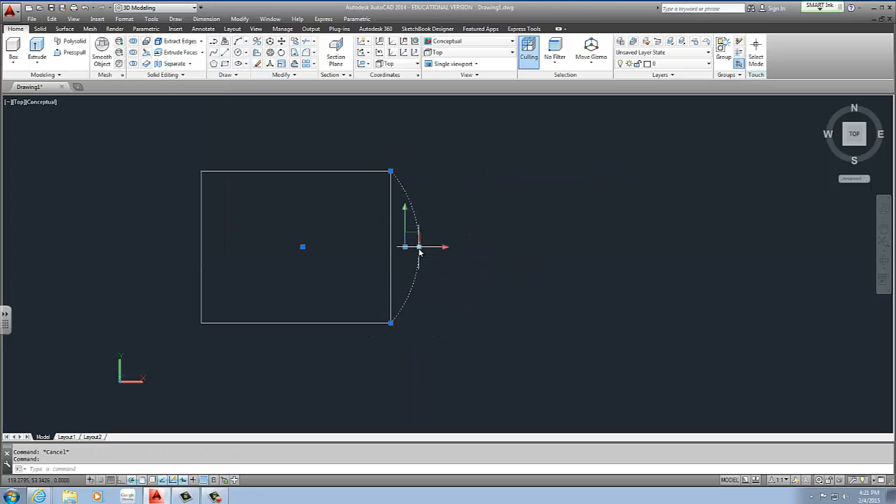The arc is pretty simple, you do a 3-pointed arc. Where are we, arc? So 3-pointed, like so. And you know what, I'm gonna have to change this. So I drag the center of the arc, make sure it snaps onto the line, and then you adjust the back too.

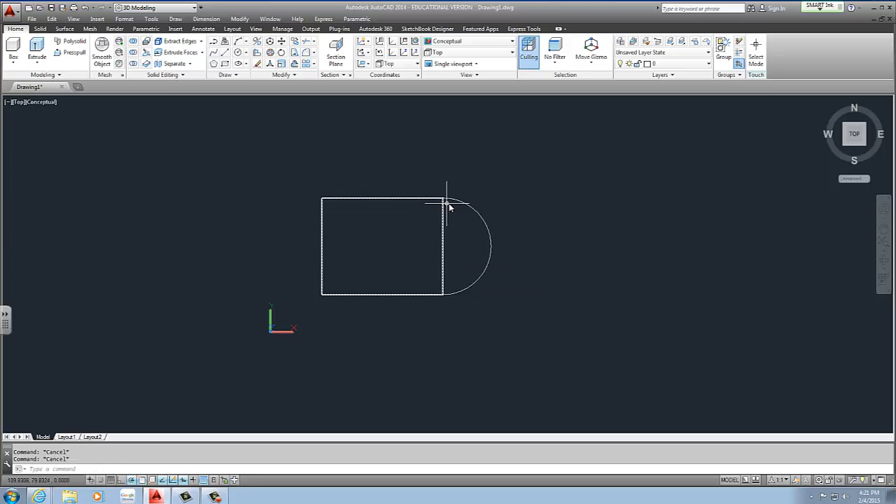Create your arc. Now you can explode the rectangle because it doesn't have to be a complete solid object, because we need to use the center as our circle.

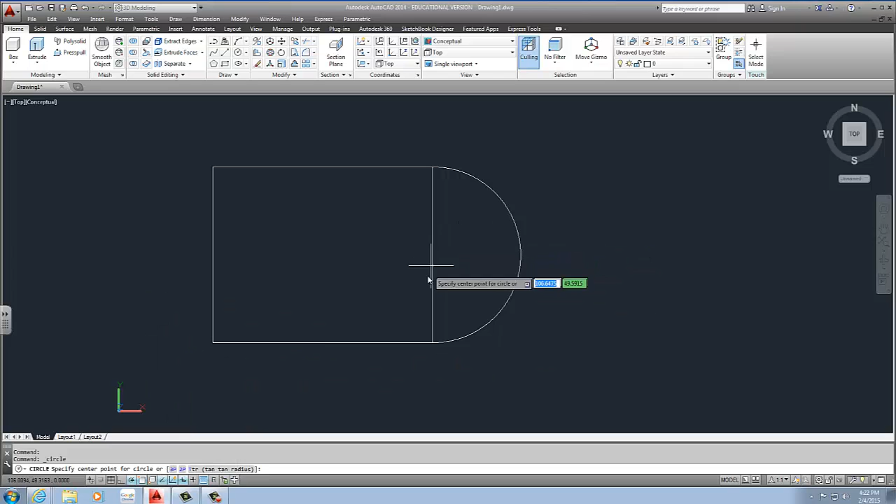So the option would be to, actually we can just add the circle now. So circle, we'll create a circle right at the center of this line, making sure our midpoint osnap is active. We select it there, we type in R for radius, because that specifies a radius. We are default radius, diameter would be the option. If we want diameter, we'd type in D, enter, and then type in 10. So we left it as radius, and the radius is 10.

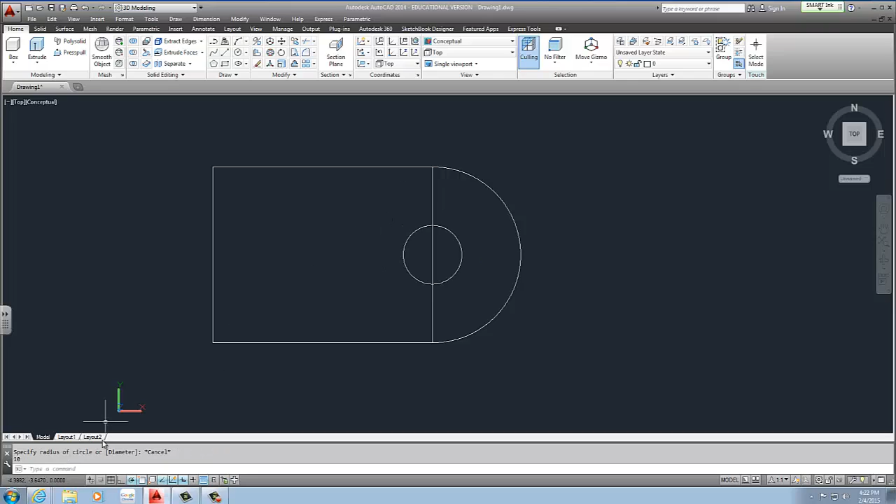I'm going to explode this rectangle I created. I go and select it, I go to modify, there is an explode tool. We explode that and we move that line. So we get something like this, and from here we can just do press pull.

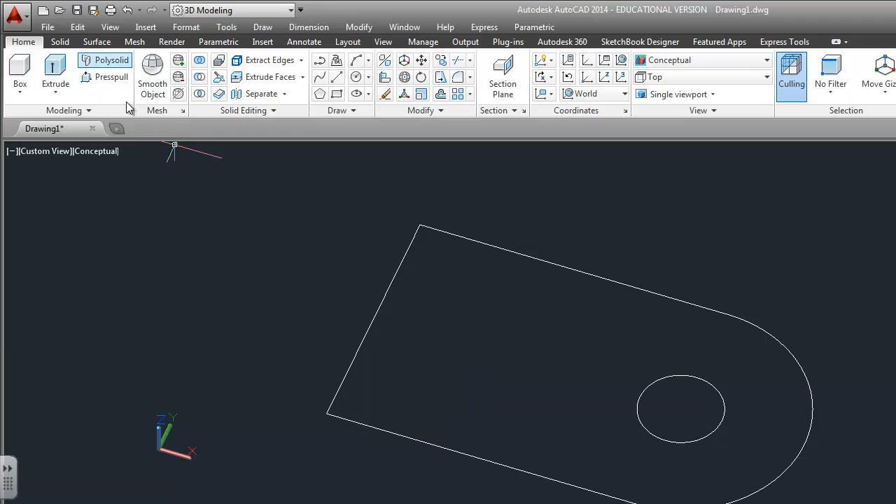That's if it takes it. Oh, it's not. Okay, I'm gonna... oh, we need a single solid object to do the press pull from. So we can't really do the press pull at this moment.

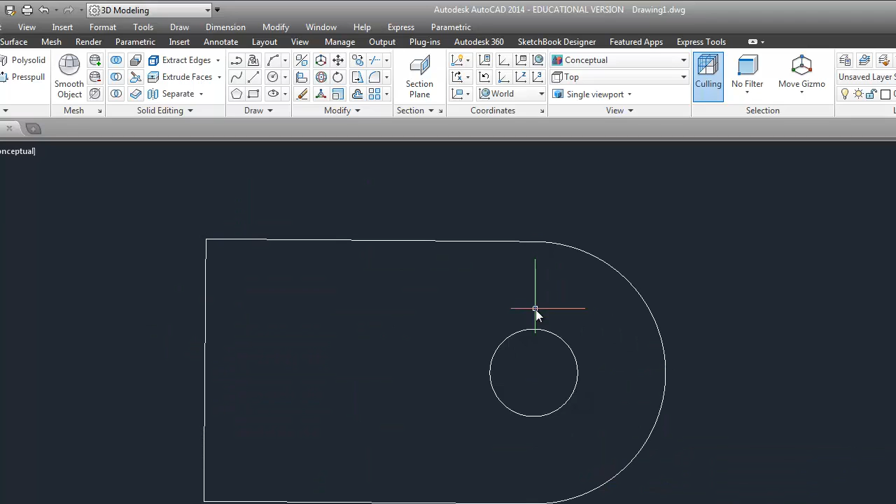So instead, we'll have to use the extrude for this part. Problem with that is that it's no longer a solid line or a polyline, as you can see. Here, I'll show it to you guys. They're all segmented lines, and extruding that will not allow us to create a solid object. It will pretty much extrude each line separate.

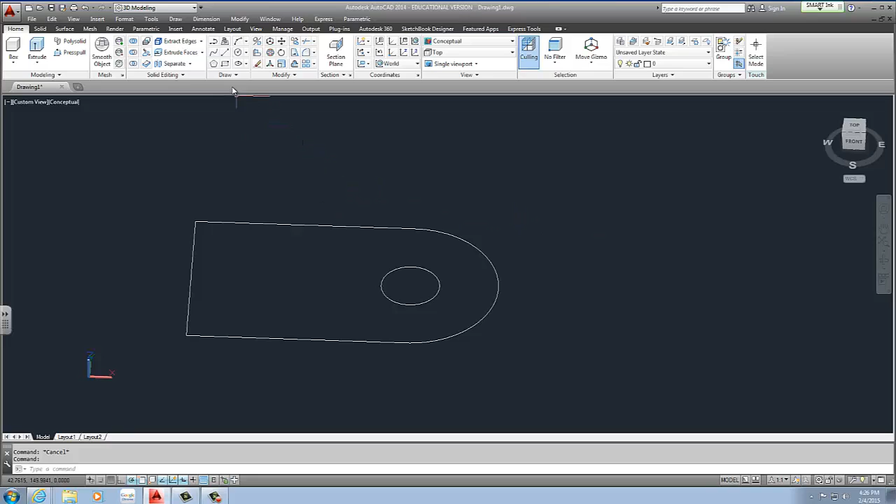So we have to resolve that issue, and to do so, what I recommend doing is using the command region. So now we make it a region. To do that, what you want to go to is draw. There's an arrow next to it, and there's a region command. You can also type it in if you can't find it, that also works. So you select region.

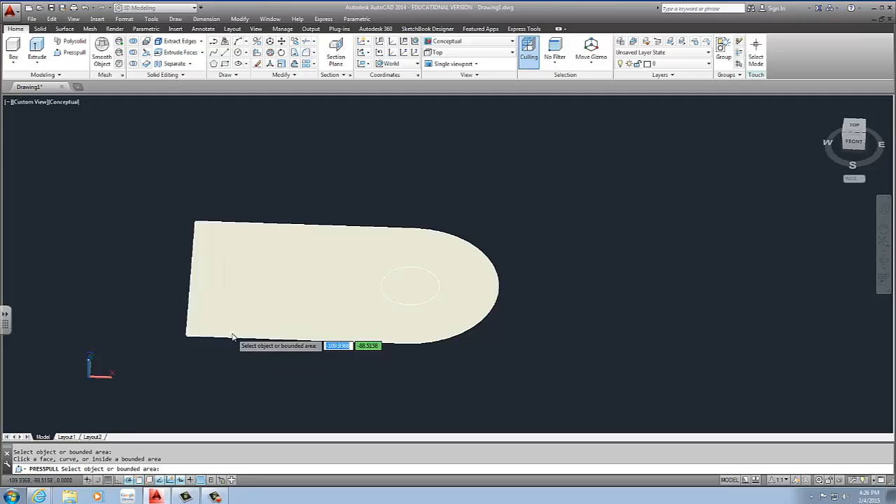We select the entire object as we have created, we click enter or space to accept it. And now we can use the press pull command. Well, guess it doesn't want to press pull, so we can use the extrude command, and we'll extrude it up.

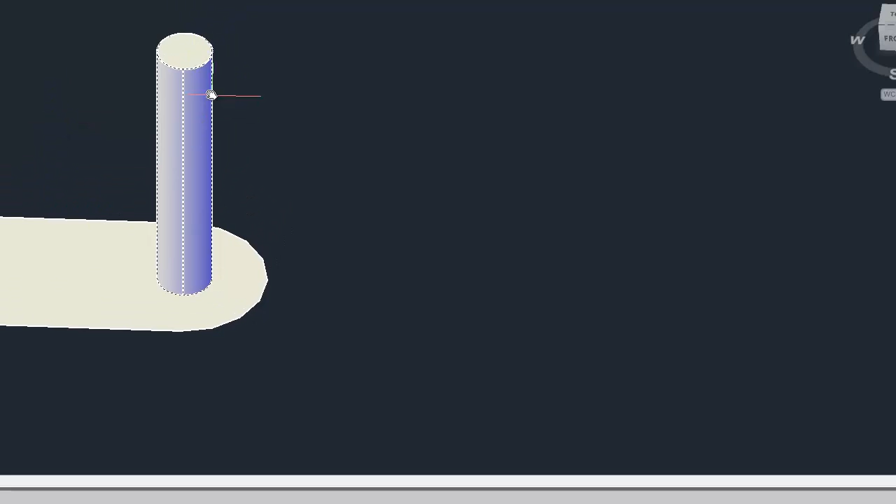Now the option is to either extrude the big part, or you can extrude the cylinder first. I recommend doing the cylinder first because it's going to be too hard to select after you create the big cylinder, the big part. So create the cylinder first, use the extrude command, do that, and then extrude the second portion, which is this main portion, at which we do have a dimension for, and it's going to be 15.

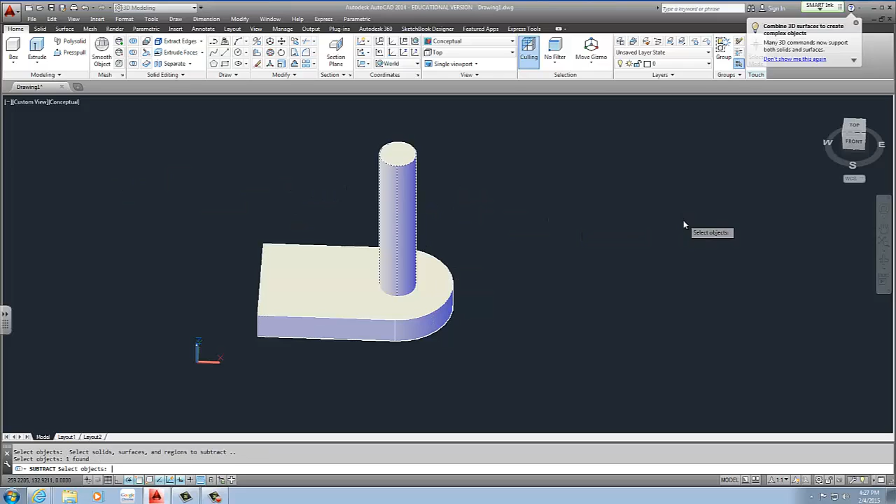Once you have these two parts, you use the subtract command. You subtract from the large part, click enter, select the cylinder, click enter. That creates your first fundamental design.

Second part, I'm going to create every segment of this one big part on a top view, and then I'll rotate it around using the rotate gizmo. I think it's the easiest way of doing it. Now, if you don't agree with me, please leave now.

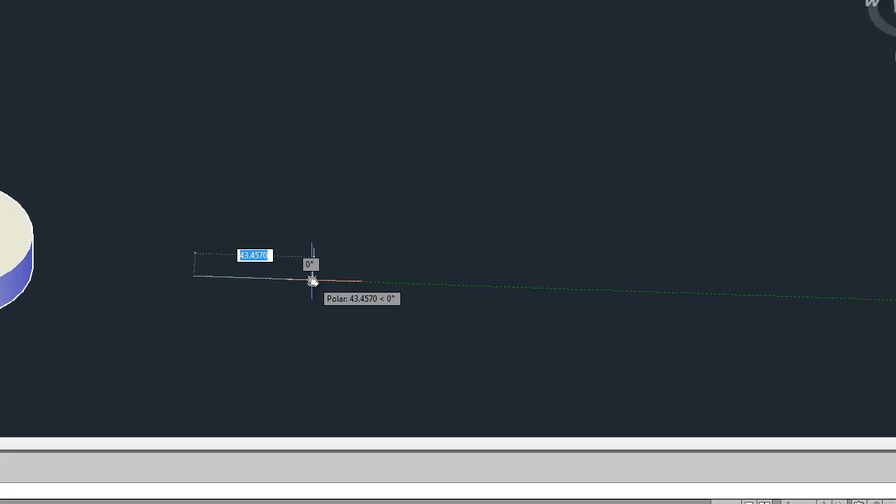Alright, so we start a line command where you're going to create the triangle that's right on top of here. I'm just going to use a line command, do a horizontal line that is 25, the overall height, using a little math here.

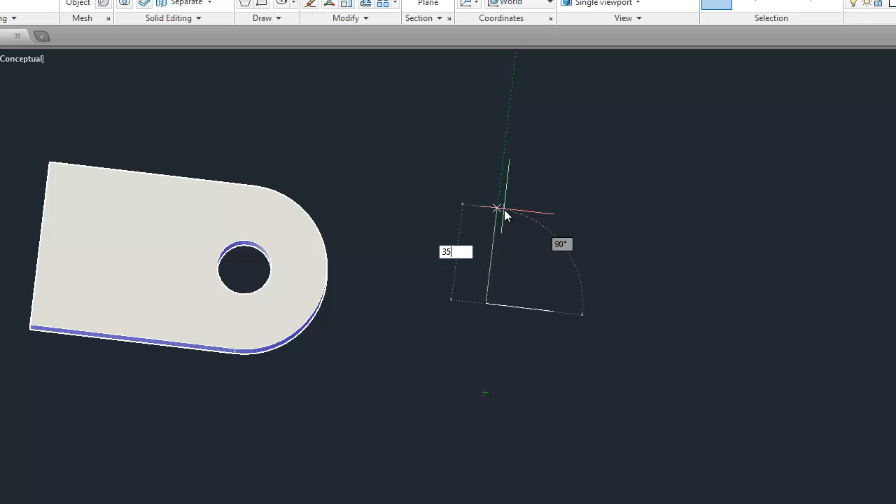Actually, I want to make sure I'm on the top view. Using a little bit of math, I discovered that it's 35. Am I right? 30? No, I think it's 45. It's 45, and we close it up.

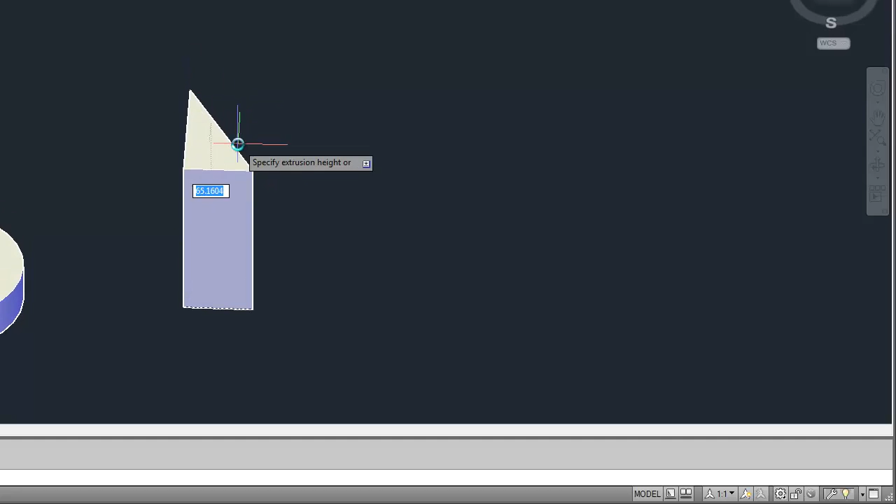Also, we need to create this at, well, actually we can try press pulling it. Now we can press pull because we already have something that's 3D. Normally, press pull won't work until you have something on the screen that's 3D, so it can figure out which way it's press pulling or extruding out. Our thickness for this is 10.

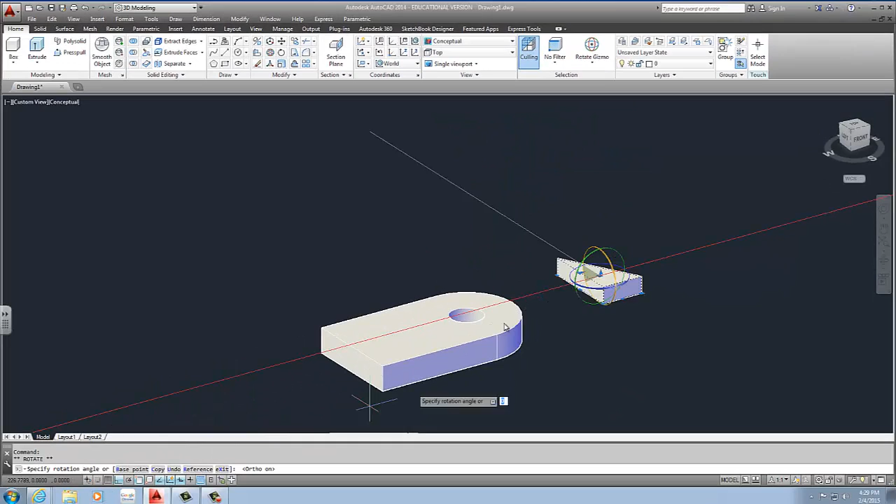Now to do the quick placement of this part, all you have to do is select it, change your move gizmo into rotate gizmo. We rotate it based on, for me it's the x-axis. I have to make sure my ortho is on because otherwise I risk the chance of creating a weird not a 90-degree angle. And then all we have to do is move it based on the midpoint of the back to the midpoint of the top here.

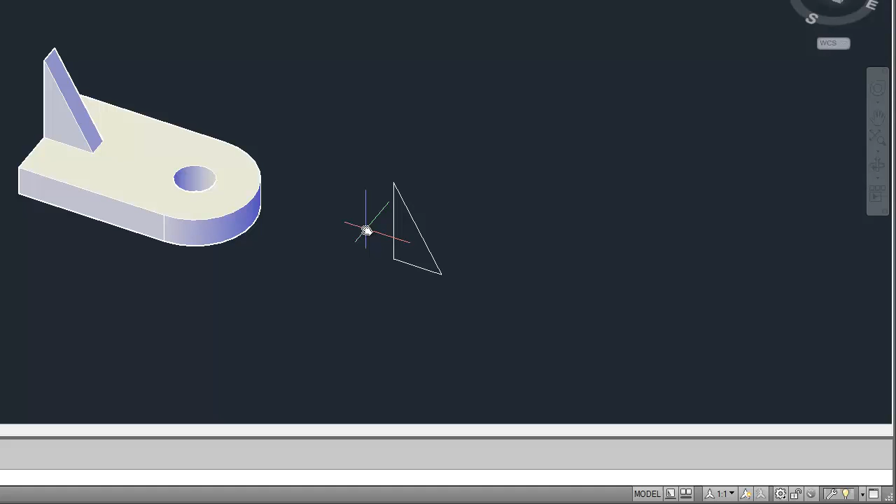Now the way I have my default setup is that it leaves my 2D sketch as I create a 3D object. You can change that, you can remove that, so every time you design a 3D part from a 2D part, you could remove the 2D part by setting up del object. So you have to type in DEL OBJ, and you could set it from a value higher than 1 to 0 where there is no data left behind.

So I put 0. If I had a rectangle now, rectangle, and I did my extrude command, and if I move it over, oh man, I think it's 1 that has to be deleted. So that's del object of 0, so I don't delete any object.

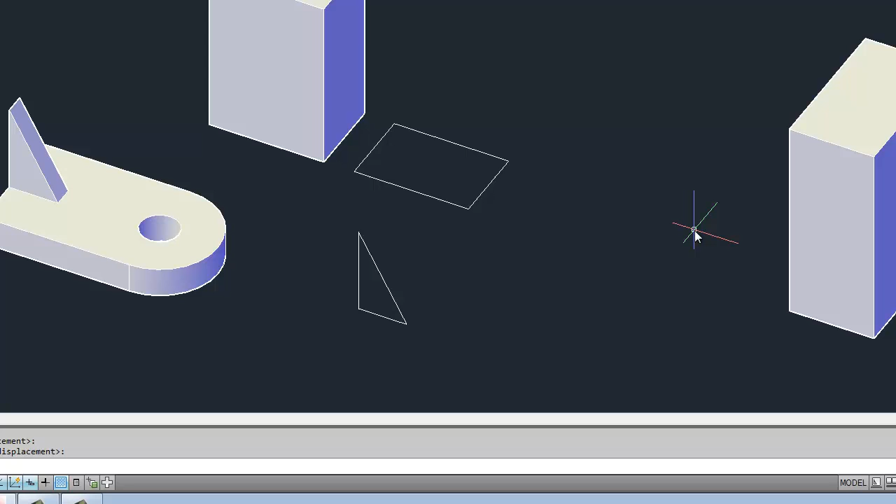Del object of 1, I'm going to do the same exact thing, extrude, move it over, it disappears. So that's it. Del object 0 means it won't delete anything. Del object 1, it will delete the first sketch. And I'm not quite sure what the other del objects are because it goes up to as many numbers as you can plan. So but you should do that before you do a press pull, or?

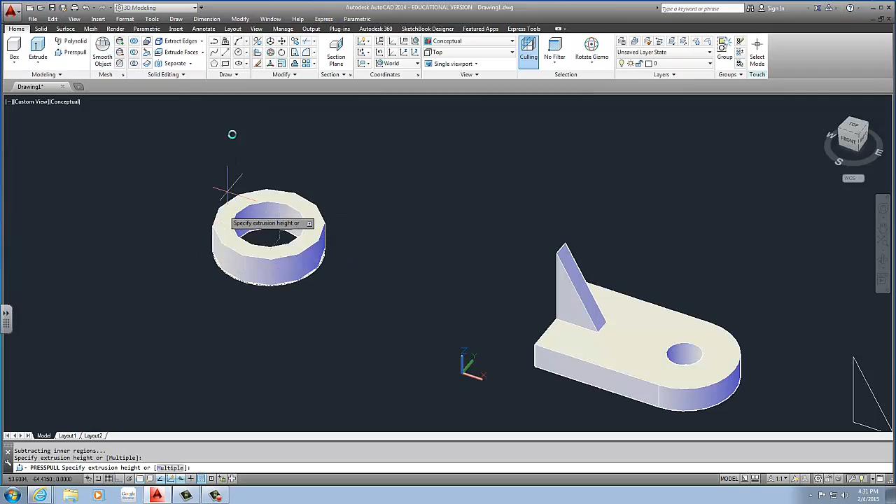You would. Okay, so that's the first segment of the part. My next option is I can do the cylinder. It's pretty easy, it's 2 circles. One is diameter of 60, and the center circle of this is a diameter of 40, and I can use the press pull of a height of 60. So that's my second part.

I can, if I want to, I can actually move it over. I would have to select the center of the bottom, so you have to look for that center circle that shows, and it even gives you the information there. You click on that snap, center snap, and you place it at the midpoint. Yeah, it's the midpoint here.

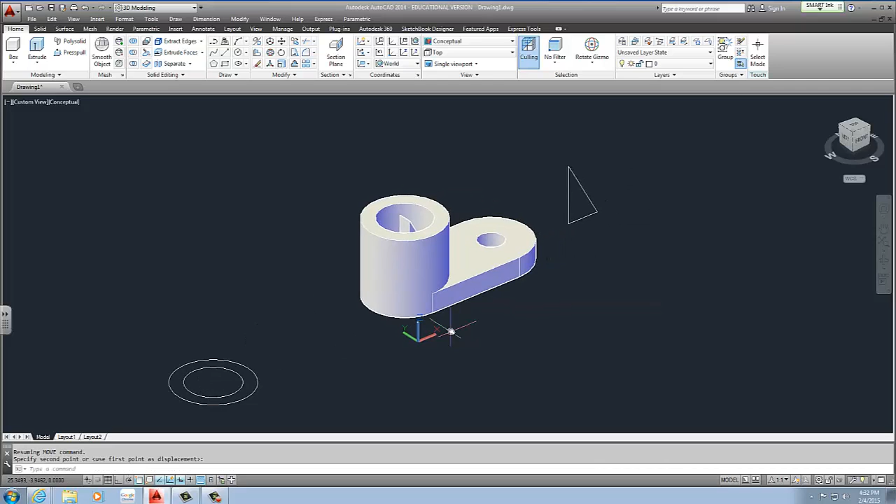So now what I realized is my triangle's off. That should be in the front. Oh, it's radiused. That's not good. And then we'll just move this triangle forward, which now I've realized that we're going to have to adjust this a little bit here.

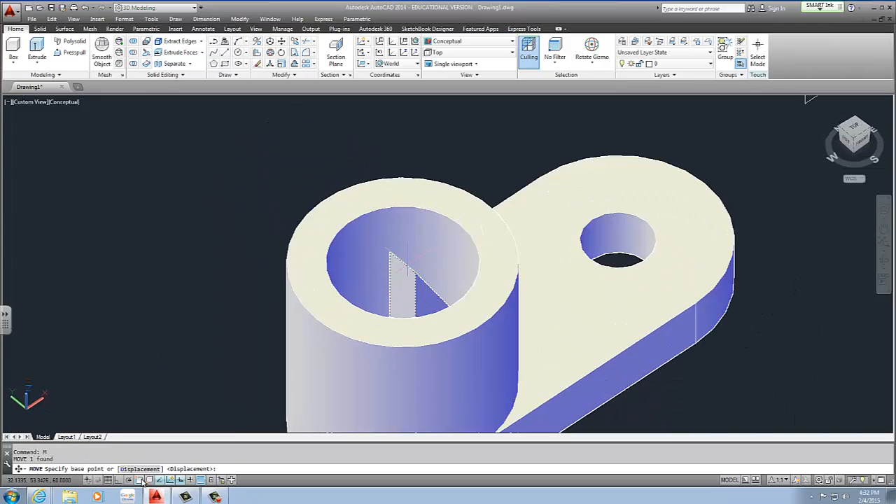Making sure I have the quadrant active, I'm going to place that to the quadrant. Maybe is there a gap on the drawings? You can't tell. Alright, we'll fix this later. But, so we have the second part.

Now the final part is the back. There's a few ways you can do this. You can draw it based on the top view or a left side view. It's really up to you how you want to do this. But I'm going to do it from the top view since I'm doing everything on top view.

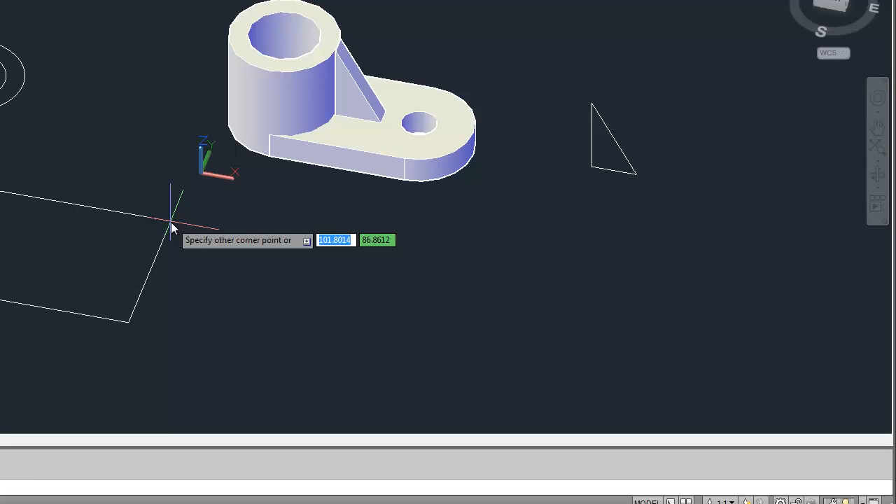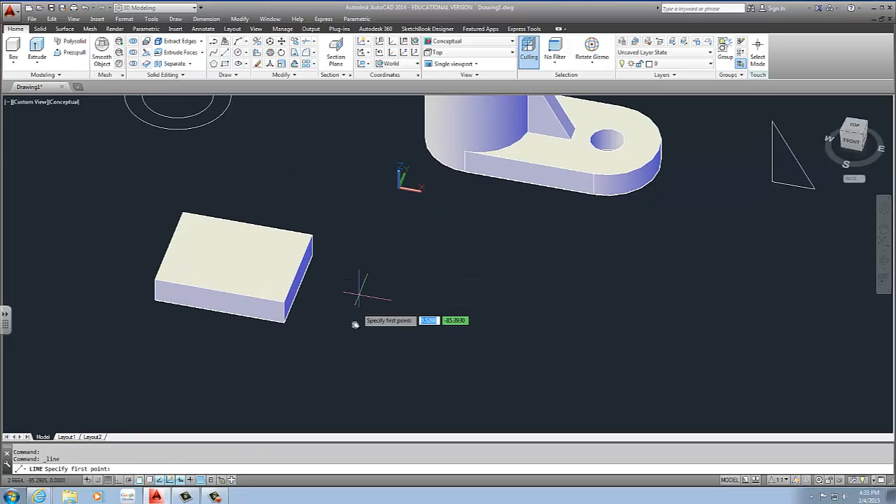Pretty simple, so rectangle once more. This one is going to be 75, so D enters 75 by 60. Pretty much the same as before, and even the height is the same, so extrusion is 15. And from there I can create this second sketch, which is the shape of a T. This one I have to actually draw out, so I have ortho active. I type in 60, 15.

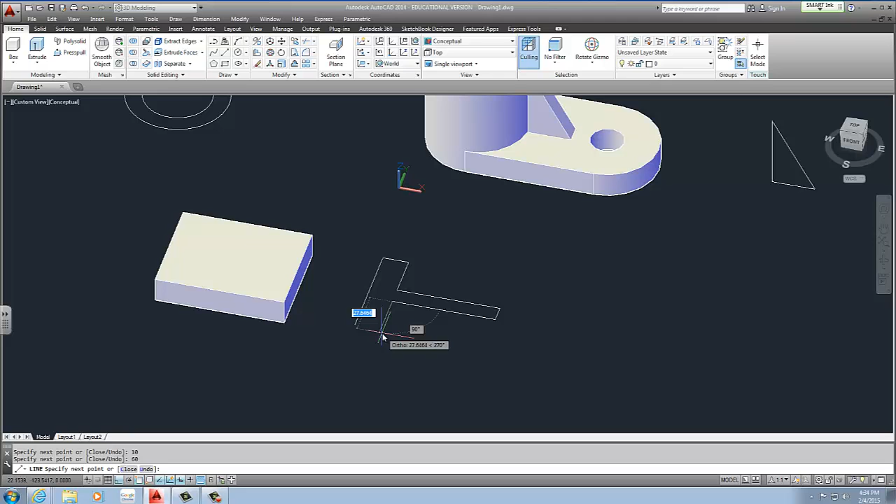This doesn't specify, so I can do the math. So 30 minus 5 is 25. This is about 10, 25. I close it up.

So there's my part, I'll press pull it. But this one gets press pulled a bit higher, it's going to be 30. I'm going to move it over based on that, the midpoint to the midpoint.

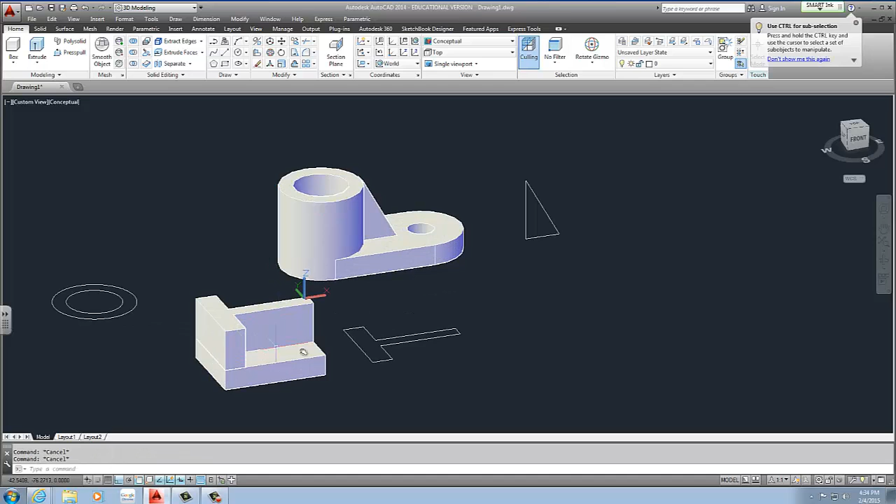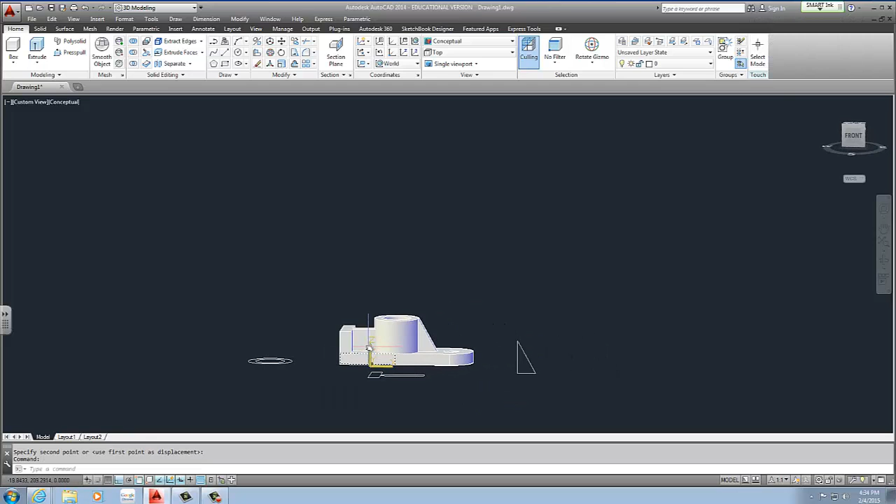Once more, I'm going to take these two parts and move them over from the midpoint to the midpoint of the circle. I guess I missed the parts, except the height is a bit higher. They're a little off in the space because they're actually supposed to be flush on top, not at the bottom. So what I can do is move it up based on this part here to the top center.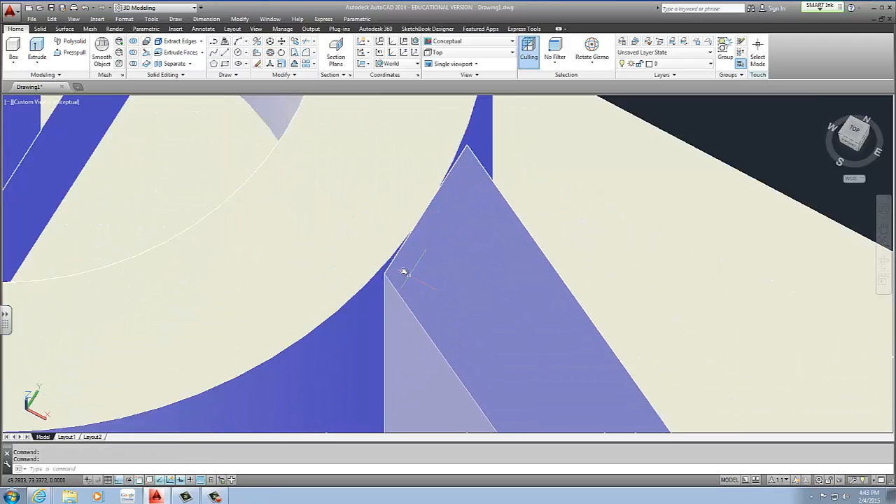Okay, once you have this completed, we realize that our triangle, if I zoom in here, maybe you guys can see it on my screen, that there is a gap. We don't want this gap. So to fix this, we need to use a new command.

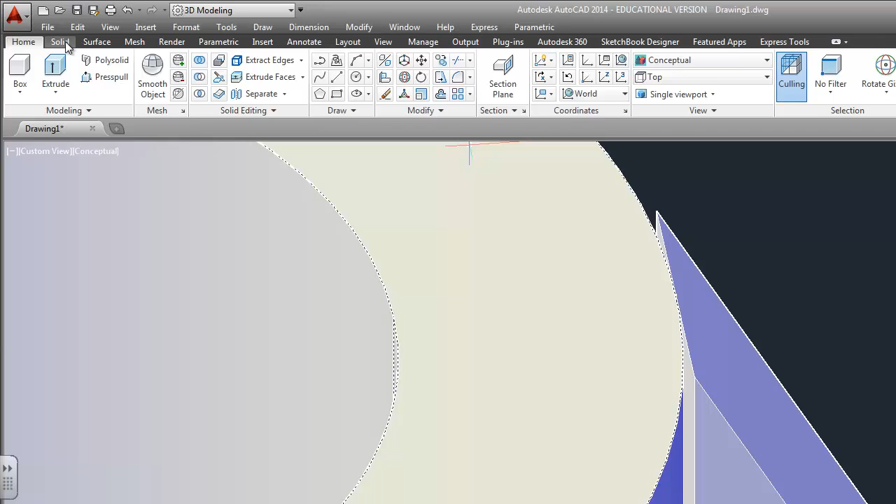It's called the extrude face. You want to rotate around to see the back of that triangle because that's going to be the face we're going to extrude out. To do that, we go into our solid tab.

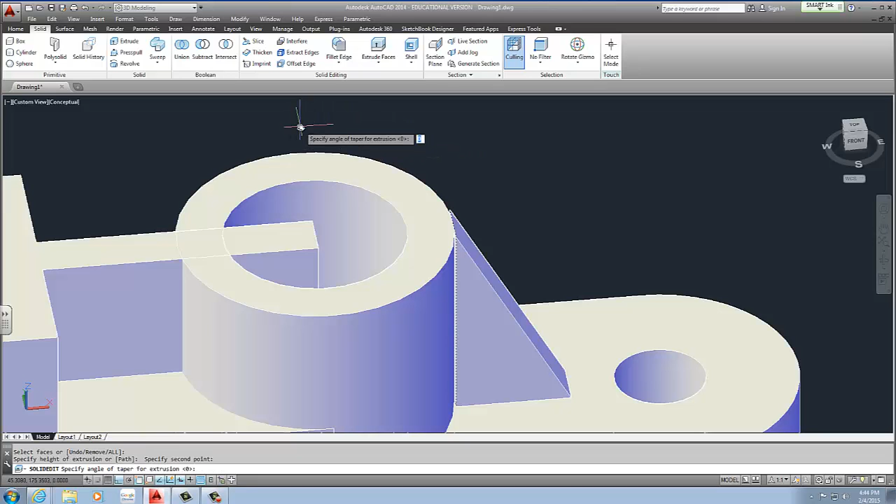Well actually, maybe, where's solid? Where is it? Oh, here we go. Solid, where it says taper faces, we go to extrude faces. We select that face we want to extrude, and we can just draw a line on how long we want to extrude it. I'm just gonna, it doesn't matter because we're gonna cut all this material out, but that's what just happens, you guys can see.

So I went to the solid tab. Under taper faces, there's an extrude face. We select that face in the back, and we extrude it out back here, this way, giving us this.

What did you select? You just select these? What's up? When you were extruding?

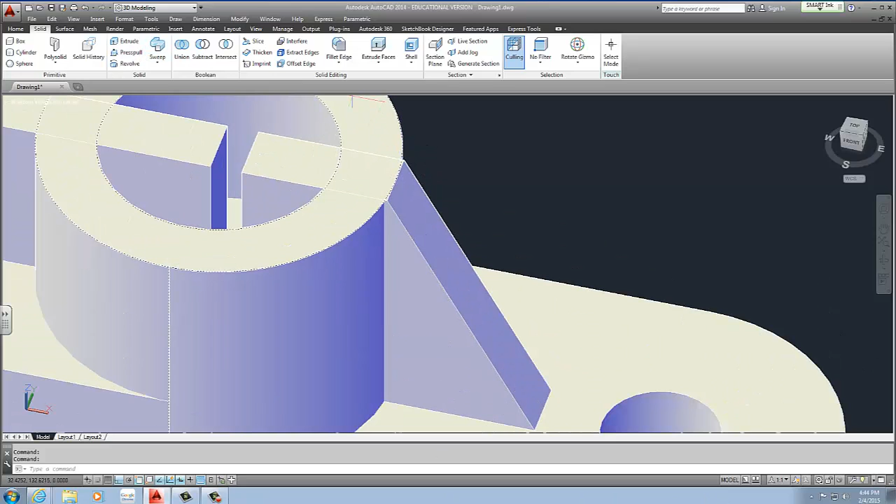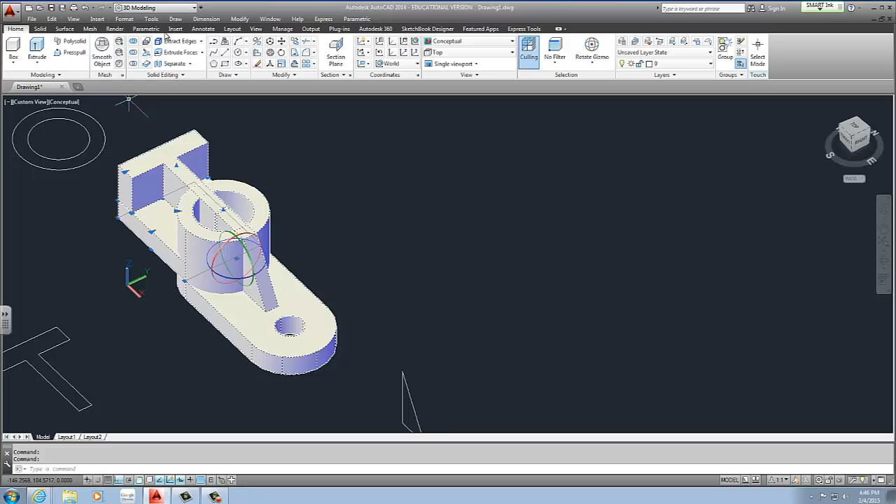Once you have all this complete, you're going to make a copy of only the parts that you're using, not the 3D parts. Because I always like to have a copy in case I need to change something, I can go back to it before I unioned it. Because once you union it, it's really difficult to edit. That's why I always recommend making a copy of it. It's not going to hurt to have a copy of something simple like this.

Especially since I just realized we didn't finish the project, we still need to create the cutouts in the back of those here. So let's do that right now before I make that copy.

Go to my home tab. I'm going to create a circle on this face, making sure my UCS is facing that way. So I have to change my UCS. There's another way you can do this.

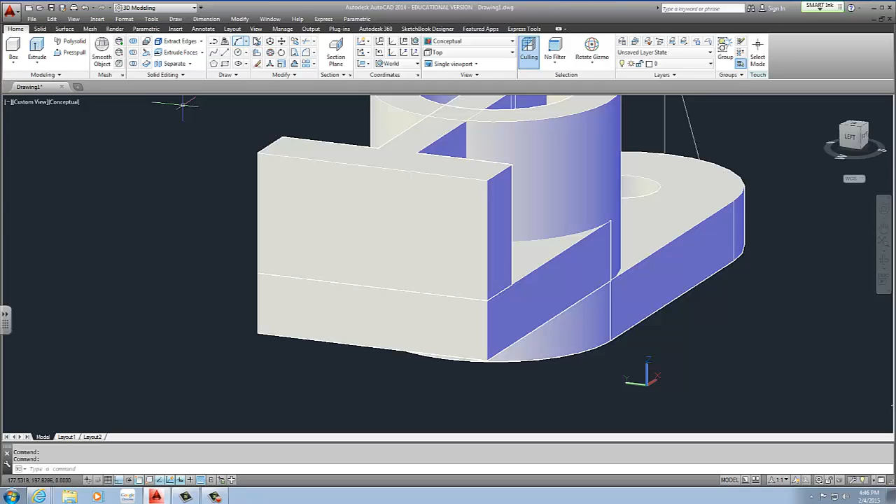You can go to a view. Like for this one it's going to be a left view, so I'm going to go left. It's going to place my item on my left view, and I can change the UCS by going into my home tab.

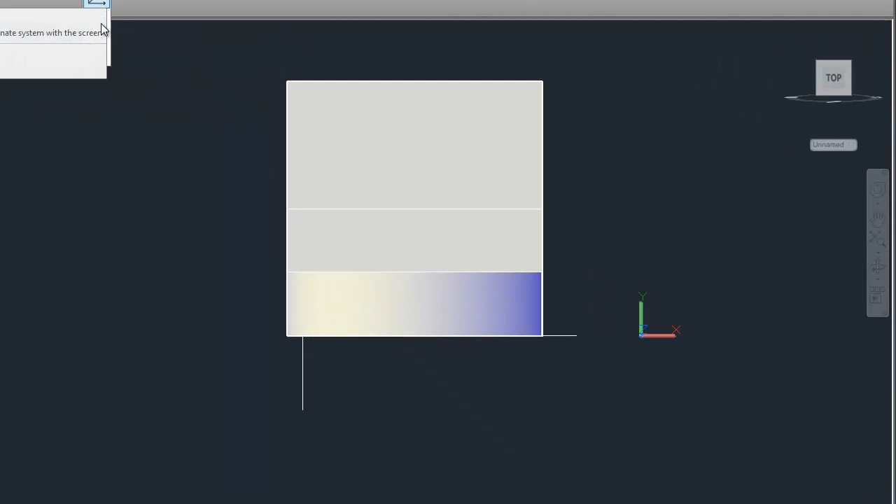There is an option, actually a preset. You can change it here to left, or you can change it based on the view you're currently in. So it's unnamed, or I can do the left. That way I have full control of the UCS.

From here I can draw the circles or the cutouts. You can draw one right here. The diameter is 16.

And to figure out, I use the move command to move it down. So I'm going to use move, going down 15, and across. I should have done it from the center, but it's going to be 12.5.

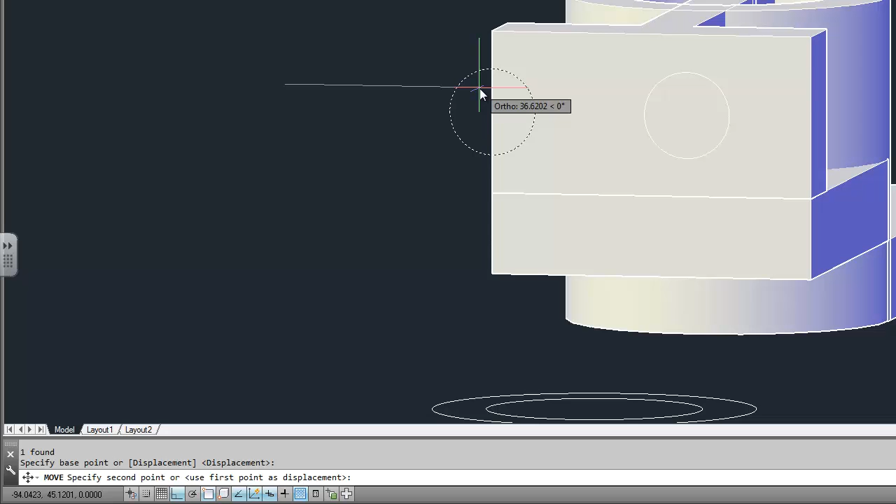Thank you. And then I'm just going to extrude this out, or you can press pull it. But if you press pull, you have to draw another circle. So if you extrude it out, you can just mirror it over. Both will work, it's up to you what your preference is. I'm going to extrude it out, not to bypass this cylinder, otherwise I will cut into it. And I'm going to mirror this over based on the center points of this rectangle here, like so.

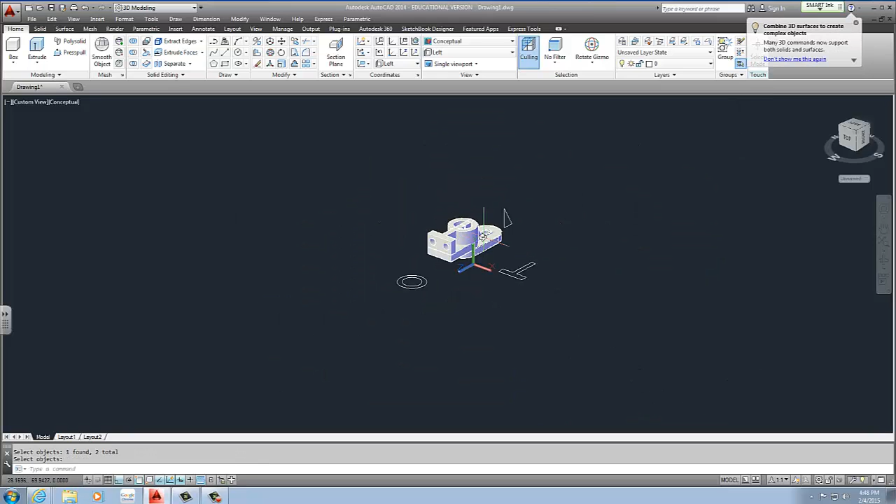Using the subtract command, I subtract both these cylinders from the back. That gives me my final part, except now I have to union it and subtract any part I do not need. So I'm going to make a copy of this before I union it together.

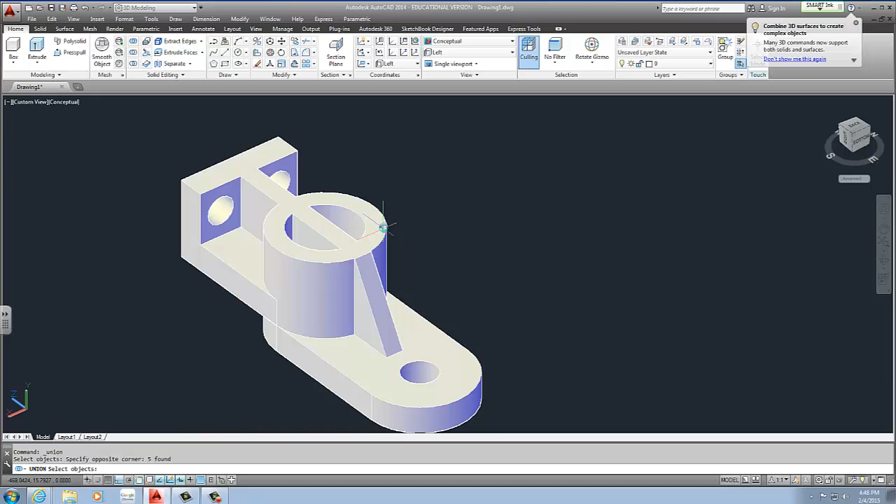Union. Becomes one piece.

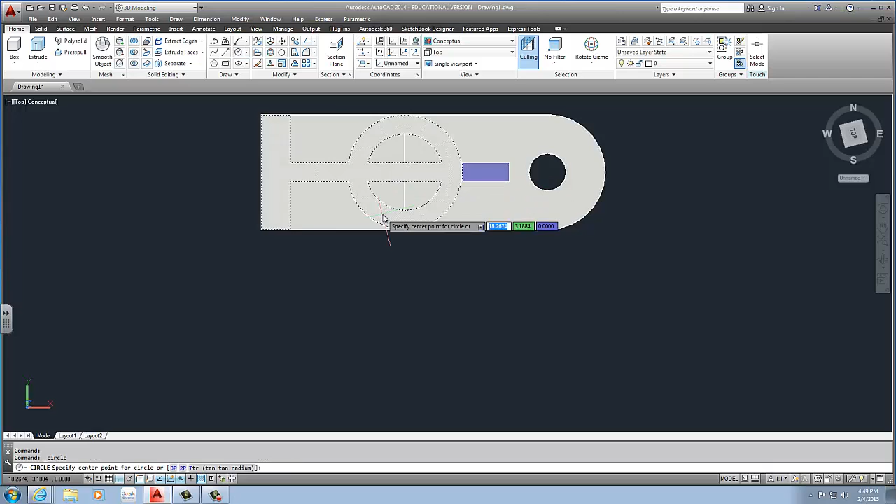From there I'm going to create a circle on my top plane. To do that, I have to change my UCS to top, or top view.

I'm going to create a circle based on the center circle, so that's going to be tricky. As you move around, if you select the edge, you will see a little cross show up in the center. Sometimes that is enough to grab it. Other times it may not work, or you might try it from the bottom.

Or I got the center point of here. That works too. And I can use the press pull command.

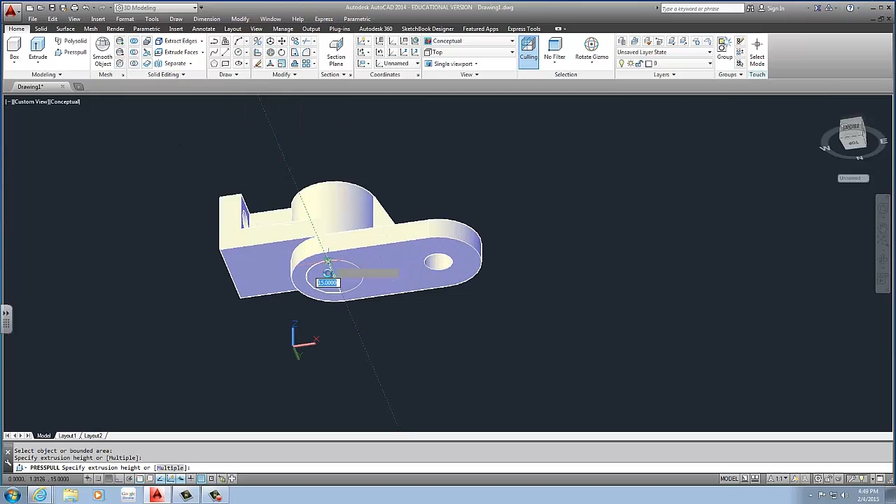It's going to take the hole, it's going to extrude instead. Extrude it all the way out and just subtract it from this piece here, creating my final part.

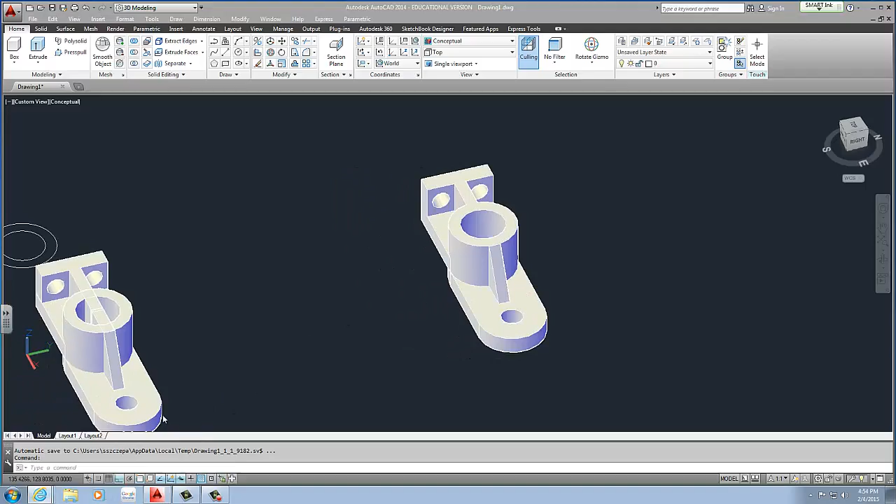Okay, so in this video there is an issue. The drawings I printed out were not as accurate, or I couldn't see it. The front is actually smaller. It's 23 radius, not as I specified as 60. So if you are doing this video, you did it wrong.

Hopefully you went by the drawings. That's all right. If you did it this way, it's fine as well.

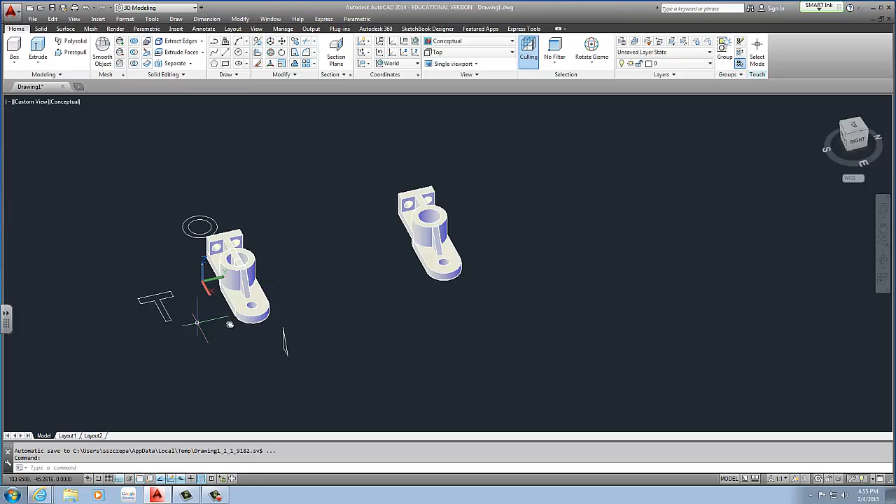Not a big deal. So once we have this completed, what we want to do is you can save the remainder parts, the old parts, as an old drawing, as a different drawing, or what you can select is all this detailed information. You select all of it, you right click, and you type in, you select isolate and hide objects.

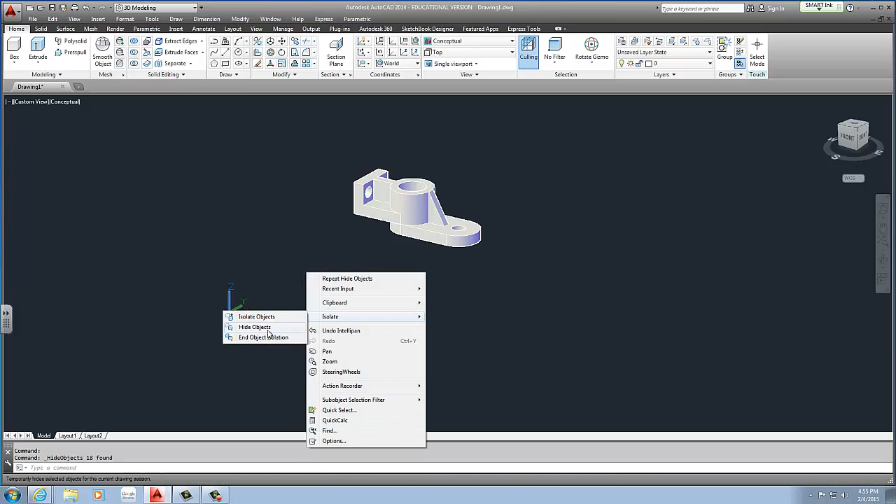So if you ever need to go back to it, you right click, isolate, end object isolation, and that will come back. So it's a good trick, especially when you're working with multi-parts where you want to hide one portion as you're working with one part. Then it's helpful. So I have this part.

Now I need to do is use the flat shot command. I'm going to start out with the top. Type in flat shot. Select create. It creates. I select a placement on the screen.

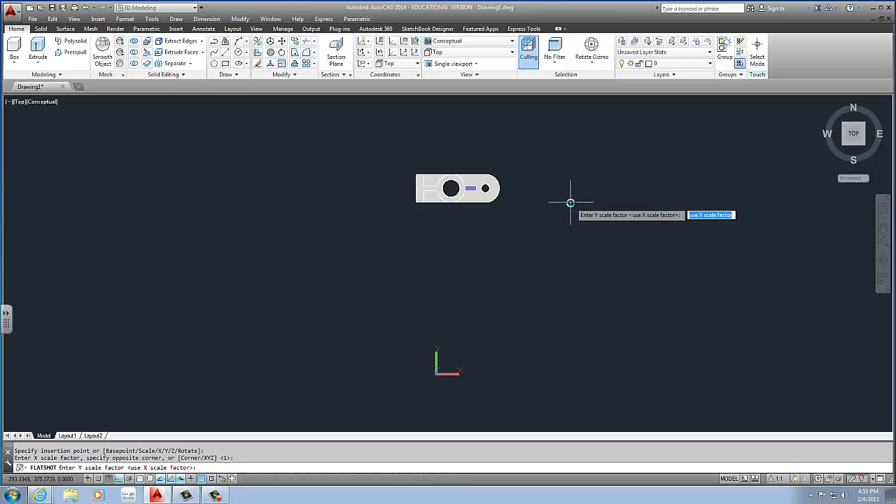Type in 1, enter, and I'll zoom out. Based on my rotation, you can see it creates a top view of the part.

I go into the front view, do the same, flat shot, create, click on the screen, enter, and place it.

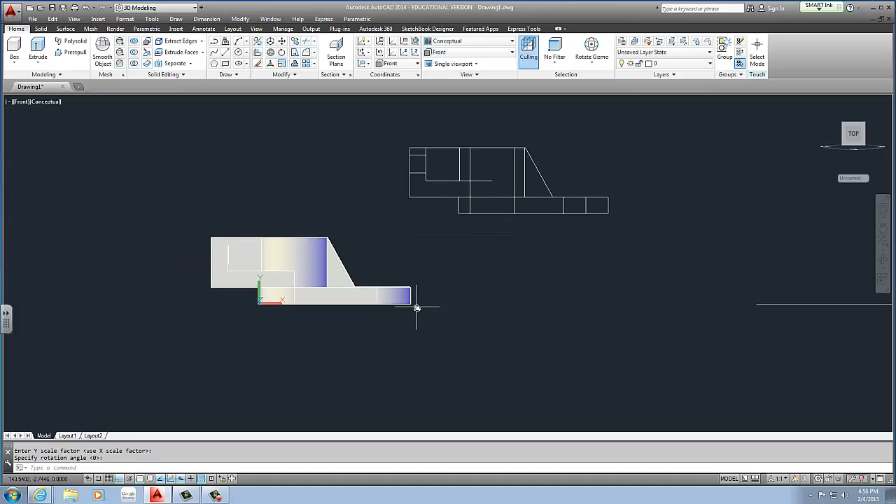And finally, I do the right side. Oh, sorry, that was changing that. I go right side here, right view. Yeah, just verifying that it is the correct, accurate one.

And once more, flat shot, create, click, enter, click. So now I have these three parts.

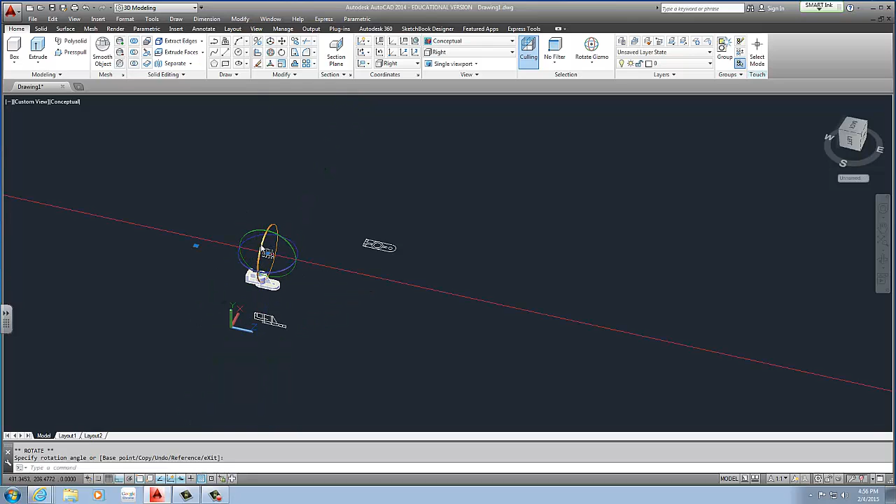They're somewhere in space, so I need to rotate them around so they're all in the same kind of rotation, or they're all in the top view or the front view, depending on what you prefer. So using the rotate gizmo, I can rotate it around.

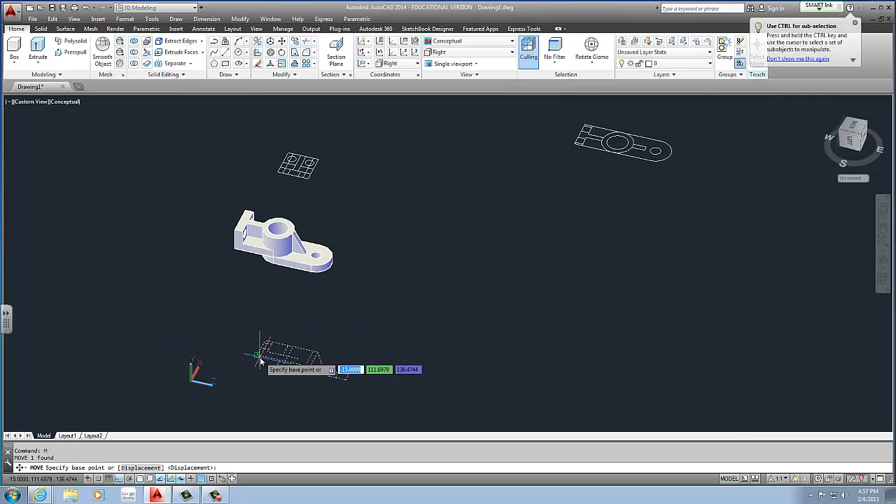There we go. And then finally, I just move them around so they actually match up. You can use the move command, or you can use the gizmo that has the move command in it also.

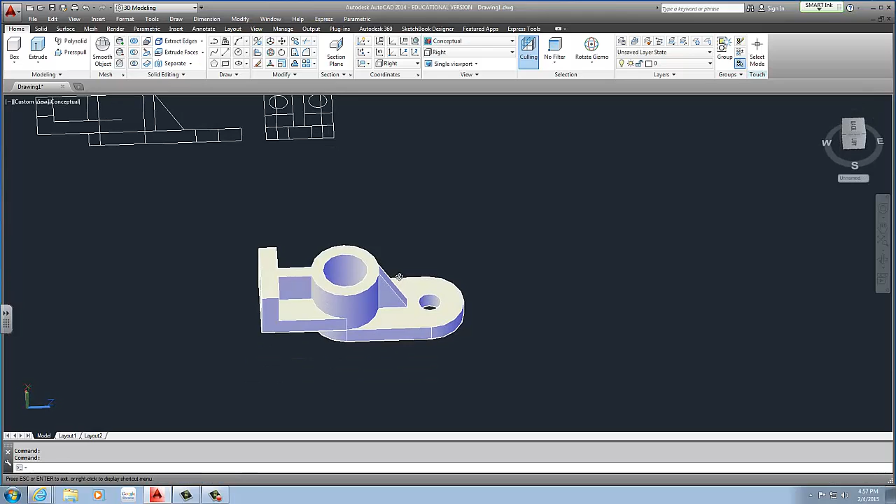So now I have the 2D drawings and a 3D drawing of the part. Usually the 3D drawing I move away, because when I do the viewports, it doesn't interfere with the viewport.

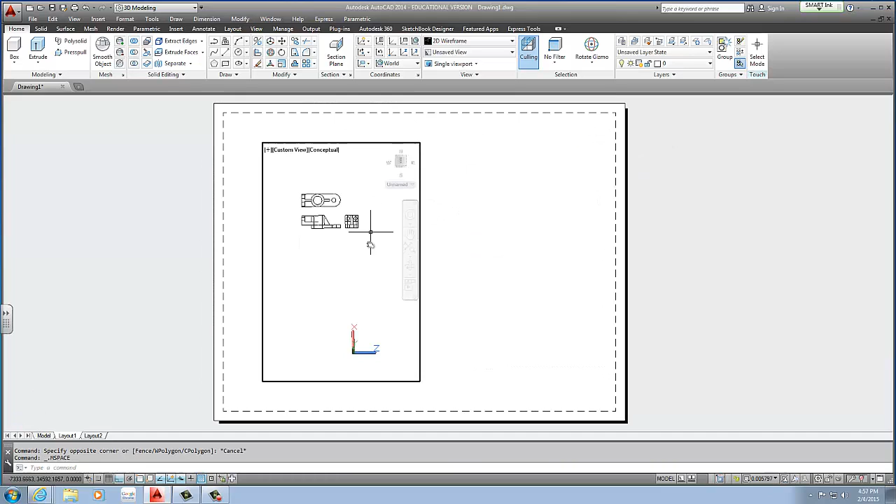There we go. So now when you're in your layout, I didn't set mine up, but you would create a viewport for the 2D drawing, making sure I'm in the top view. Where am I here? Single viewport view.

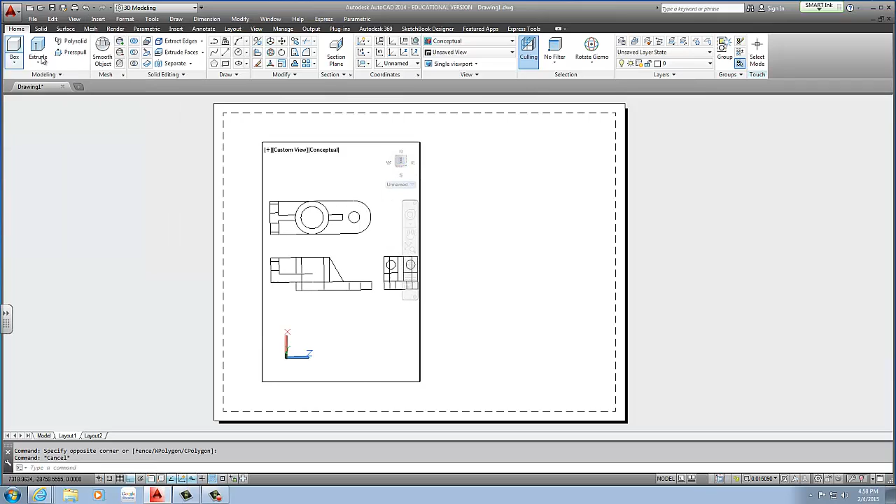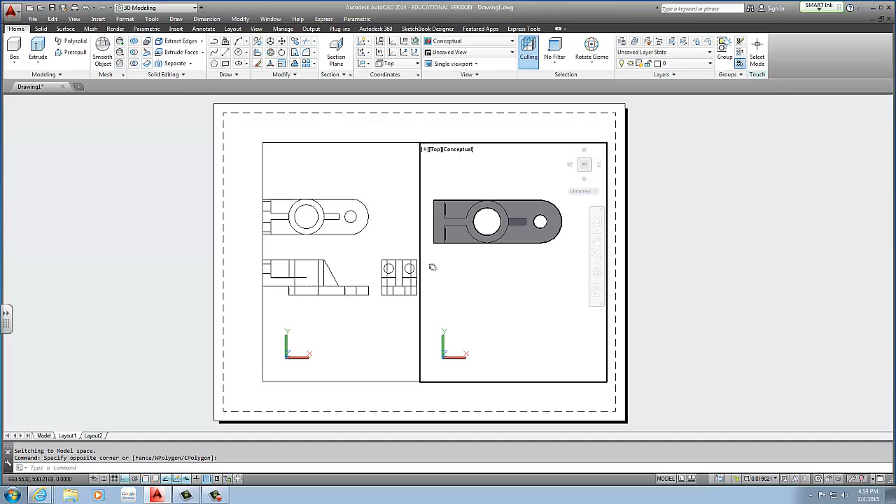So you want to go into your top view, so you go to top view. You can zoom into the location, and then of course you can specify the actual scale of the viewport, and of course you will also need to add one more viewport for the 3D part or 3D view. You can change that into an isometric.

Now, which one do I always use? Northwest? No. Southeast? Yeah, southeast is what I usually use.

Of course, you would have your title block with all your information and dimensions showing all the scales of the part. If you do not want it into 2D, or you want some additional hidden lines or change some layers,

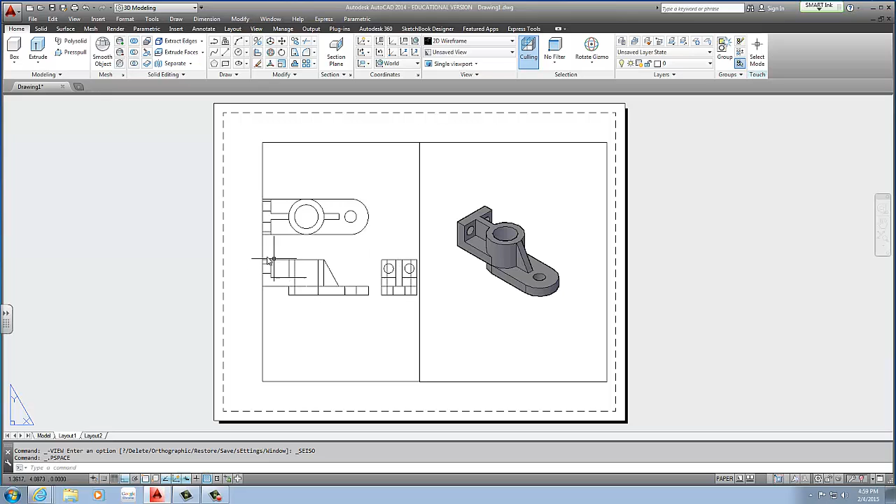what you can do is go back to your drawing and you can explode these parts. Explode and specify layers as needed. You may need to explode it twice.

Depending, no, they're all one piece. So you can change the layers as needed. And that concludes the tutorial for the C100.